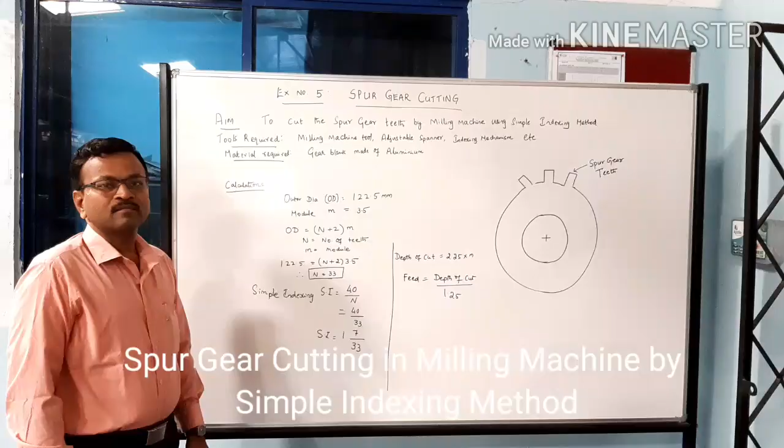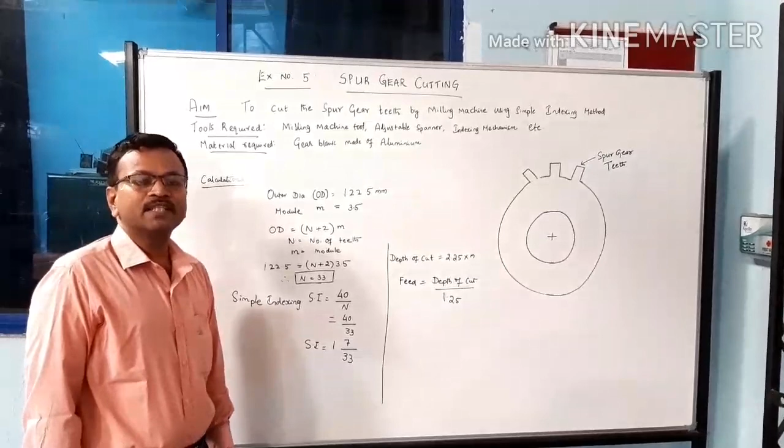Hello students, today we are going to discuss about the spur gear cutting. This is exercise number 5. So far you have done about thread cutting, facing, turning, knurling, taper turning, all the exercises are over in lathe machine. So now we have to cut the spur gear in the milling machine.

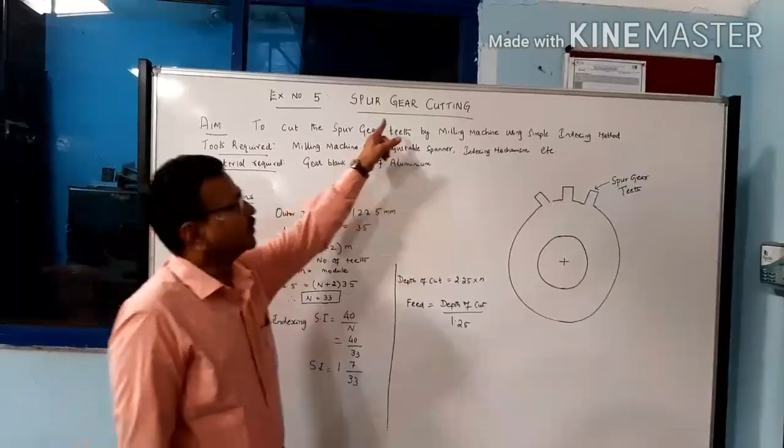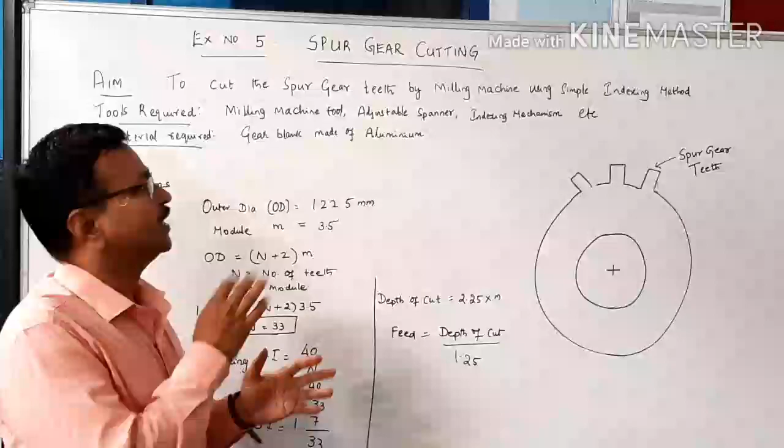Okay, first you understand what is the meaning of gear. Gear is a device which is used to transmit the power from one shaft to another shaft by successively engaging the teeth. That is the definition of a gear.

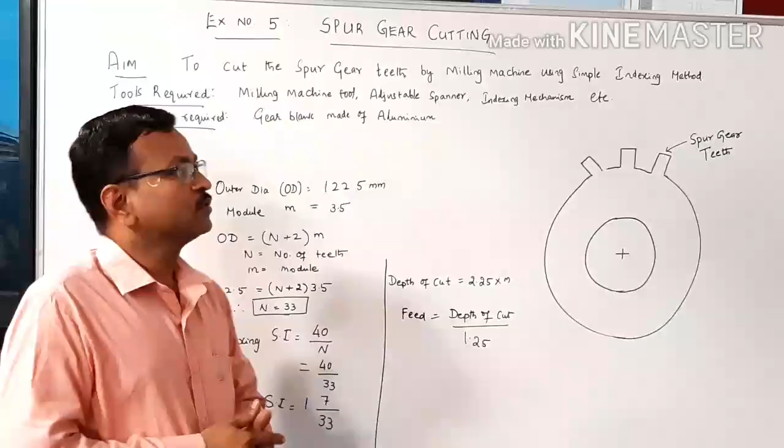So different types of gears are available: spur gear, helical gear, bevel gear, worm gear. So many gears are there. We have to cut the spur gear as per the syllabus.

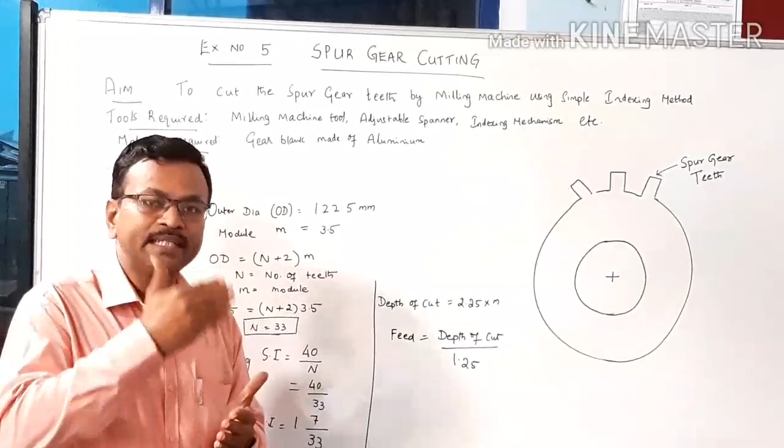So what is spur gear? Spur gear means teeth are straight, and they are parallel. So you want to transmit the power from one shaft to another shaft, those two shafts will be parallel shafts. Spur gear teeth will have straight teeth and they are used to transmit power between parallel shafts. That is called a spur gear.

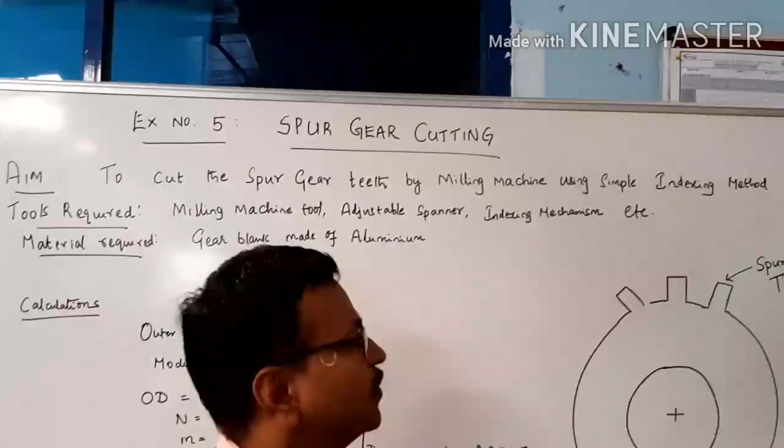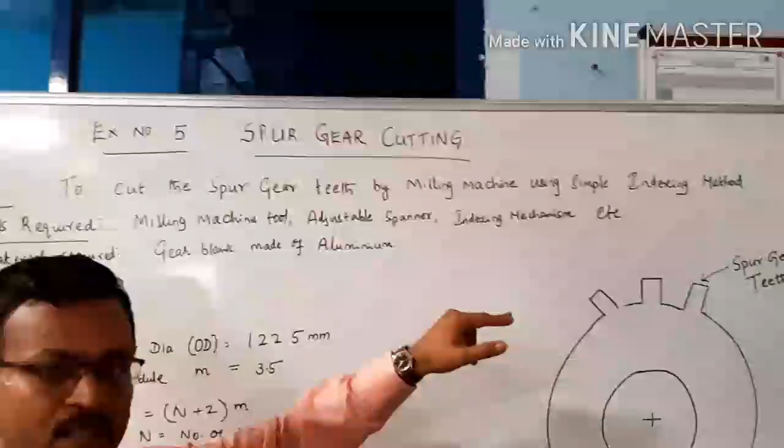The aim of the experiment is to cut the spur gear teeth by milling machine using the simple indexing method. Tools required for this: milling machine is required, you cannot use the lathe machine to cut the gear. An adjustable spanner is required to lift and lower the work table, and an indexing mechanism is required. Indexing attachment is there, we will show you. Next, material required is gear blank.

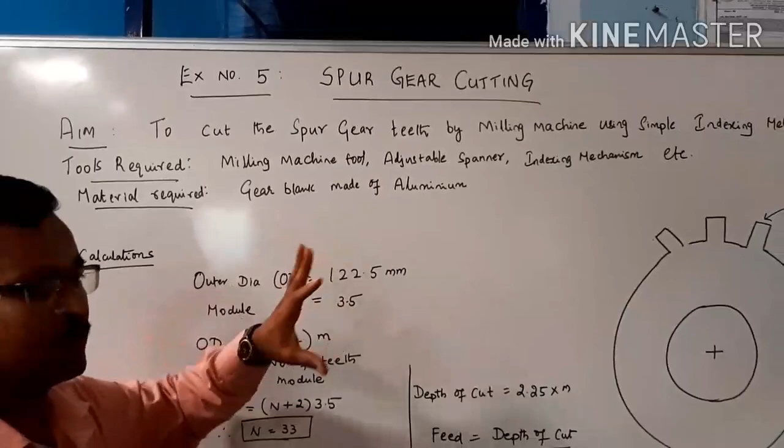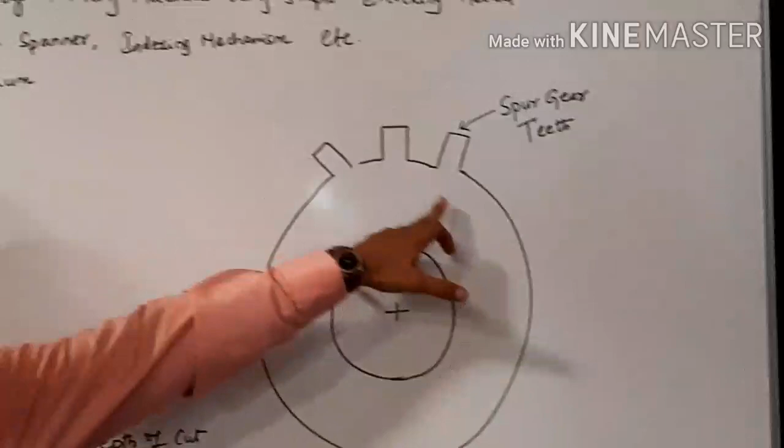What is a gear blank? Blank means it is empty, so it is a material on which we have to cut the teeth. You can see here a blank. We have cut 3 teeth on this gear blank, shown here. It's made up of aluminum material.

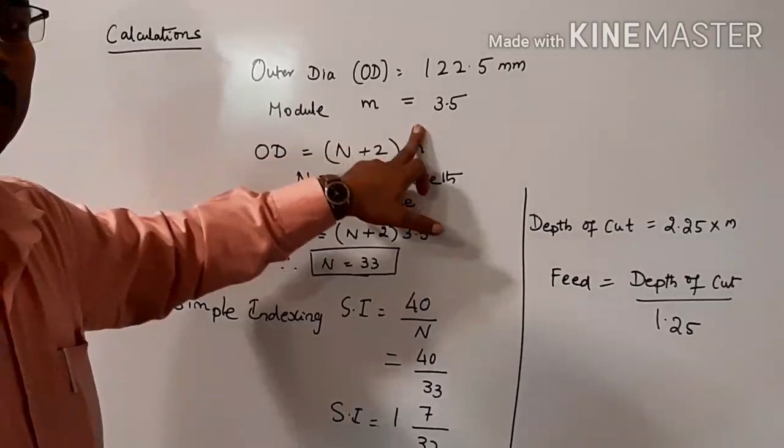The outer diameter, the calculations part, you can see here. The outer diameter OD is 122.5 mm. Next, module M is equal to 3.5 mm. Module, you have to understand the meaning of module. Module means the gear size, how big the gear is, whether a small gear or a big gear.

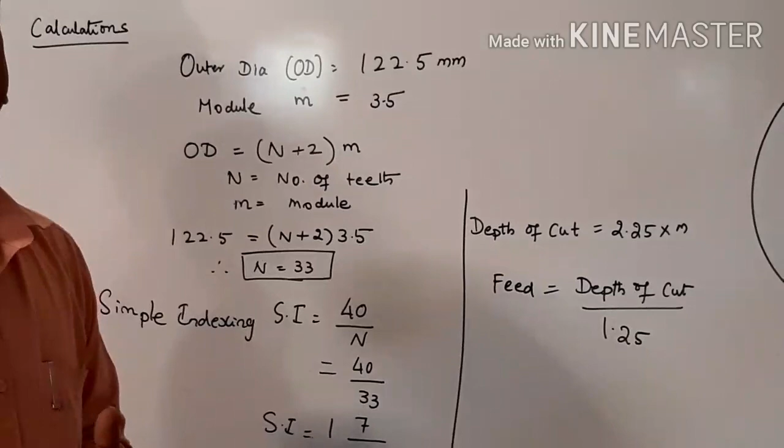So the module determines the size of the gear. The definition is the ratio of pitch circle diameter divided by the number of teeth, that is the module. For example, small size, so module will be small. Big module means big gear will be there. So module depends upon the size of the gear.

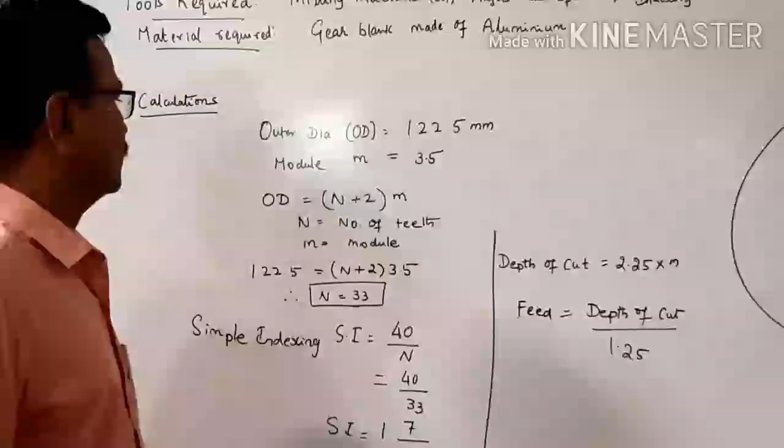Now the formula to calculate the number of teeth: outer diameter is equal to capital N plus 2 into M, where N is the number of teeth and M is the module. So outer diameter is given as 122.5 mm, that is equal to N plus 2 into 3.5. Therefore N is equal to 33. So we got number of teeth is 33. We have to cut 33 teeth on this gear blank.

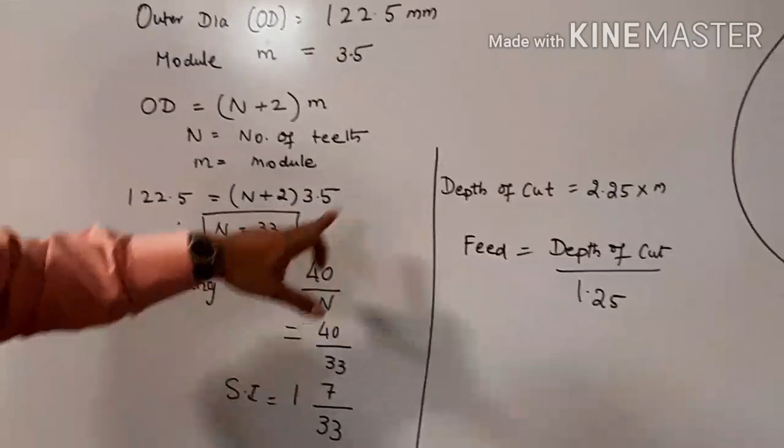Now the simple indexing formula is SI equal to 40 divided by N. So 40 by 33, we have to make it a mixed fraction. So simple indexing is equal to 1 7 by 33. It's a mixed fraction, so 33 into 1, 33 plus 7 is 40, 40 divided by 33.

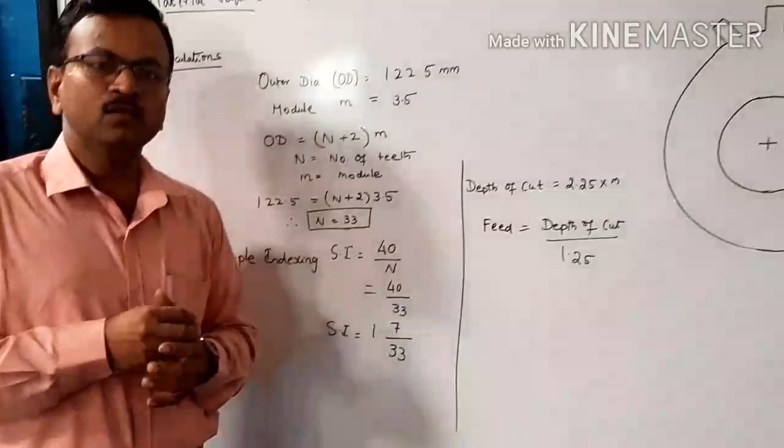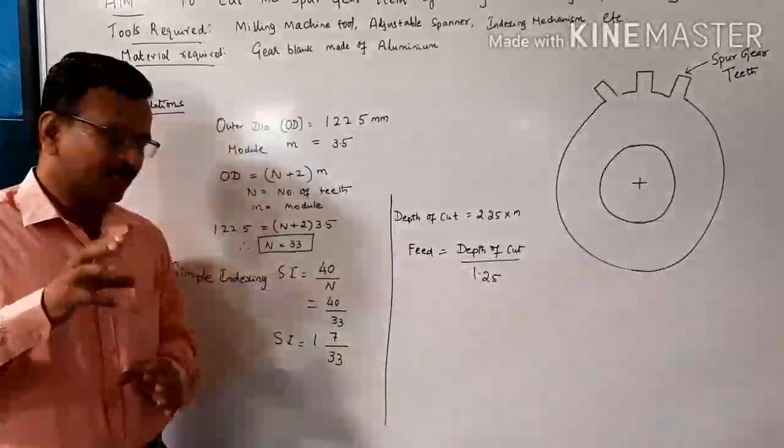So why we have to make this, means this indexing plate, different ratios are there. So even you can take another ratio also, but you have to get 40 by 33. So one of the parameters is 33. I will show you the indexing plate, 33 is there, 33 number we have to select on the indexing plate. So after that we have to fix that 33.

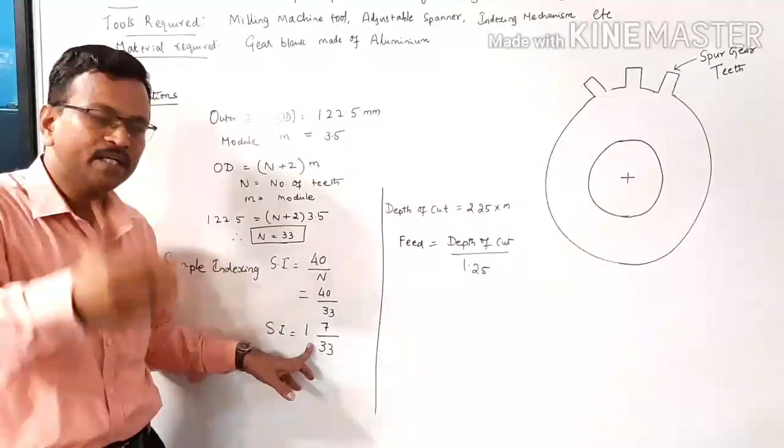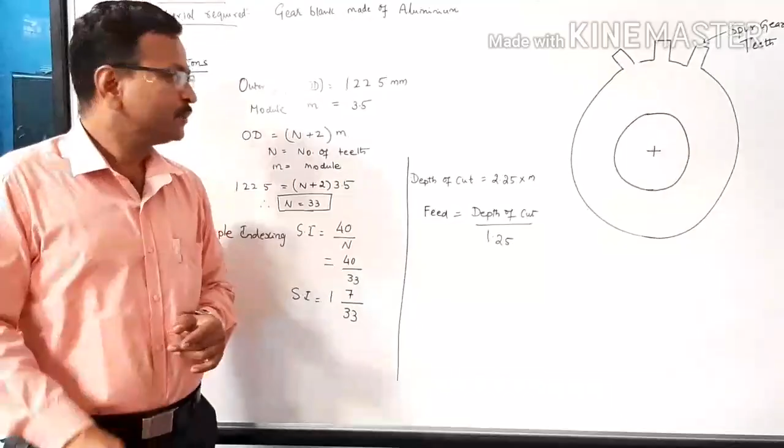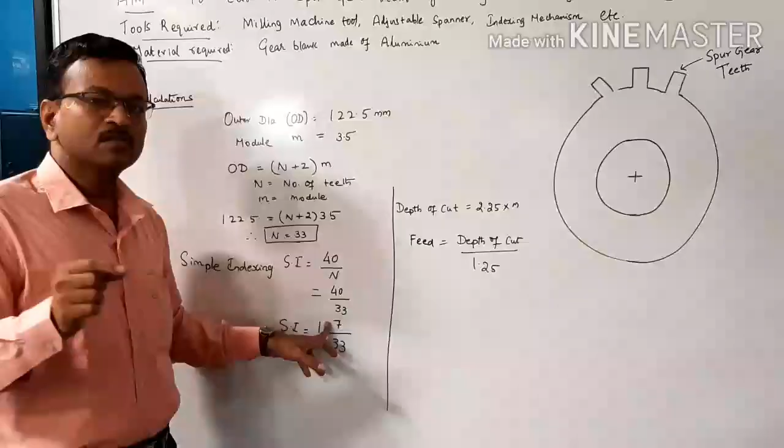Then after cutting one teeth, after one rotation, you have to move 7 holes. To move the 7 holes and again fix the gear on this indexing plate, you again start cutting the second teeth. Next, again you want to cut the teeth means again you have to go to the 33rd particular hole, then make one rotation, then go for the 7th hole. So likewise, the entire gear blank you have to cut using this simple indexing formula.

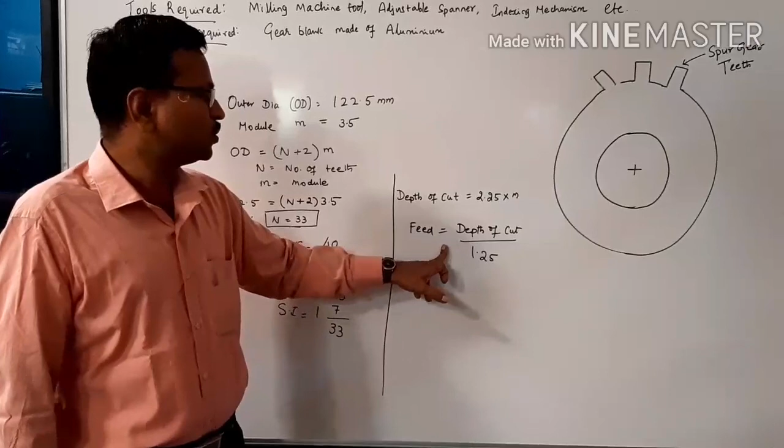So depth of cut is equal to 2.25 into M. Feed is equal to depth of cut divided by 1.25. So this is about the spur gear cutting formula calculations.

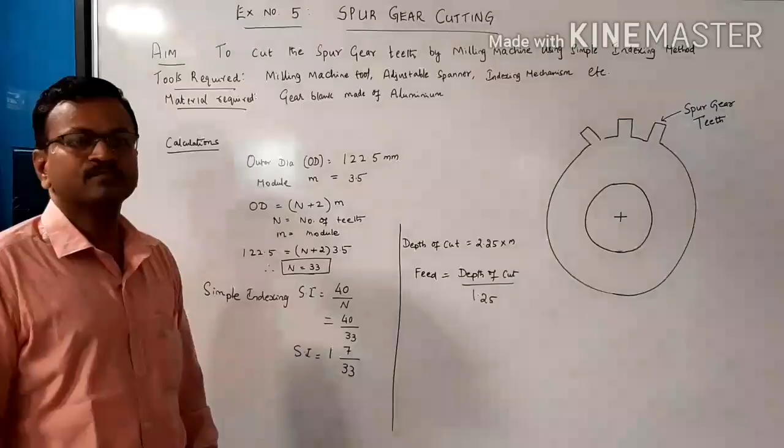Now we will go for the milling machine. This is a milling machine, the horizontal milling machine. How will you say it's a horizontal milling machine? Because the arbor, our spindle, is in horizontal direction, it's a horizontal milling machine. It's a milling cutter.

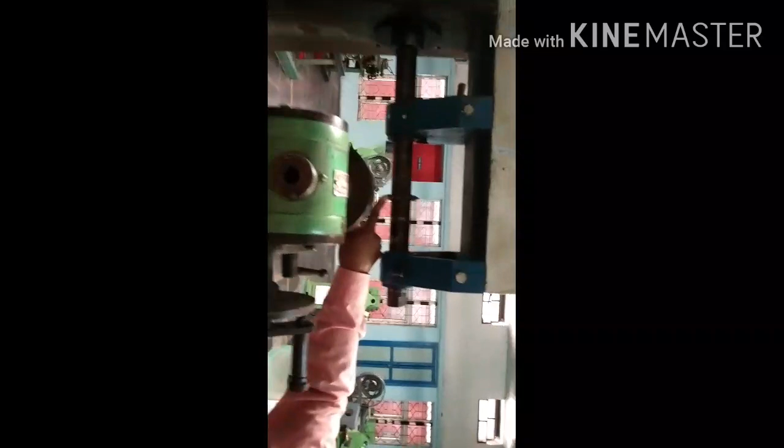Using this, we have to cut the teeth. A number of teeth are there that we have to cut, so it's a milling cutter. Number of cutters, cutting points are there. Using this, we have to cut the teeth.

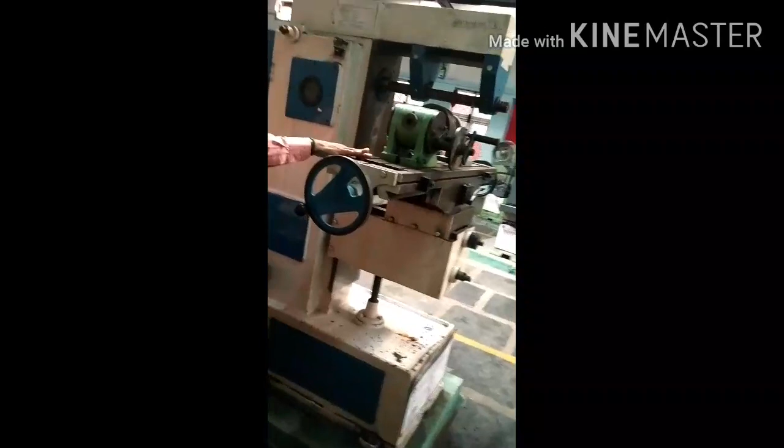This is the arbor. This is the column. This is the table, with the elevating screw. This is the work table. This is the hand wheel in order to do the feed for a workpiece. And this is the indexing mechanism, the indexing setup.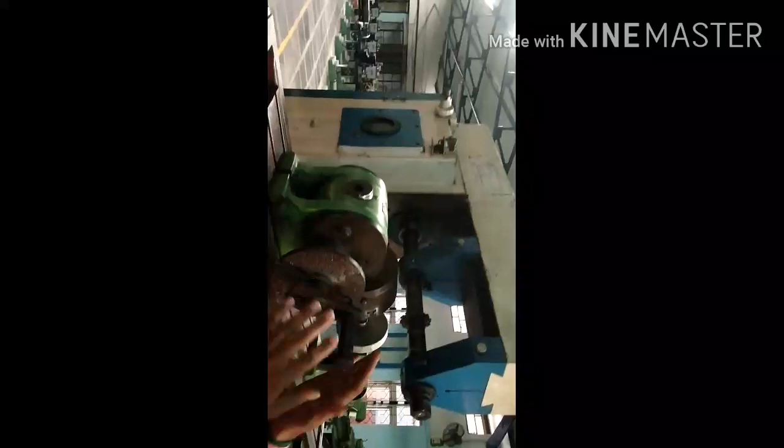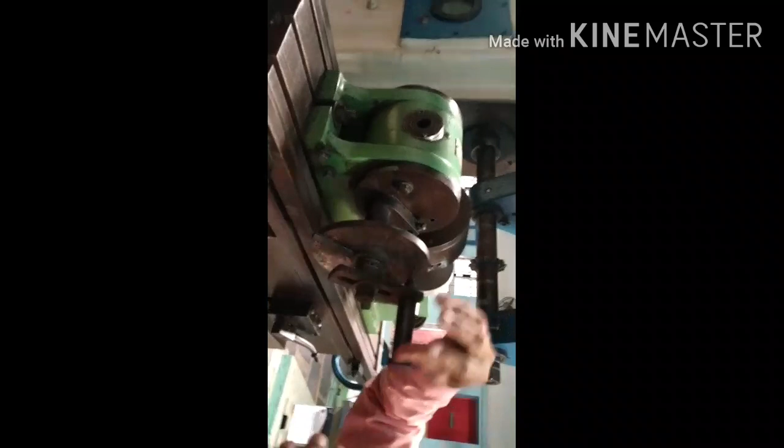The entire thing is the indexing setup. In this you have the worm and worm wheel attachment. The worm is like a horizontal shaft with teeth on it. Above that we have the worm wheel, which is going to rotate. So to make one rotation of the worm wheel, it has to turn 40 times. That is the worm wheel setup mechanism.

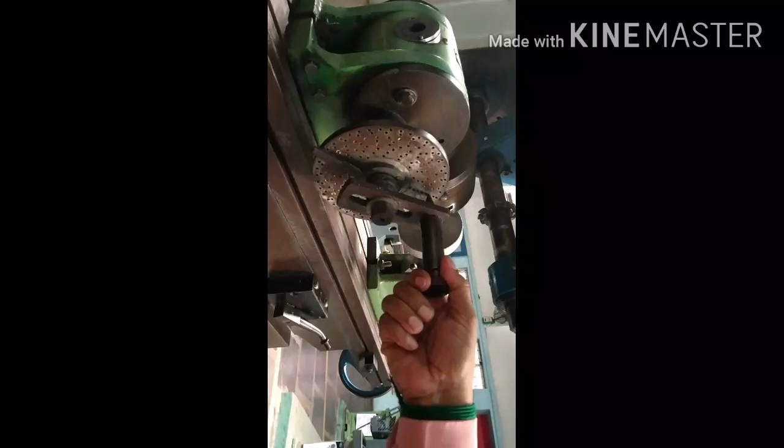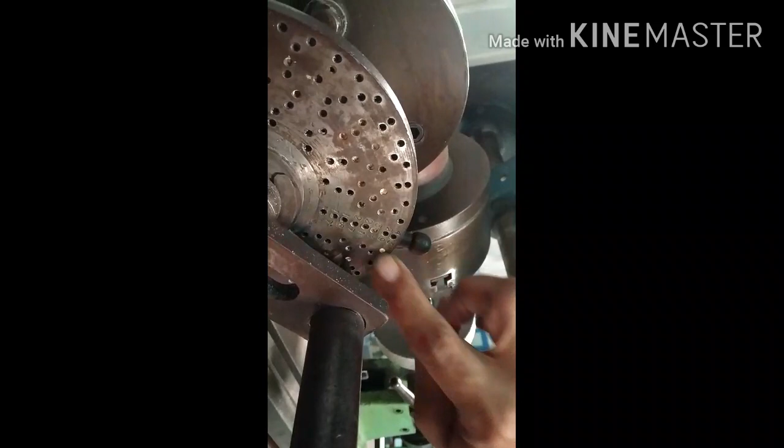And here we have different size holes. You can see here, this is 33. So we have 33 here, and 21. This is for the fraction - whatever fraction you want to make, you can make it. So we have 33, and you have to fix it at the 33 size hole.

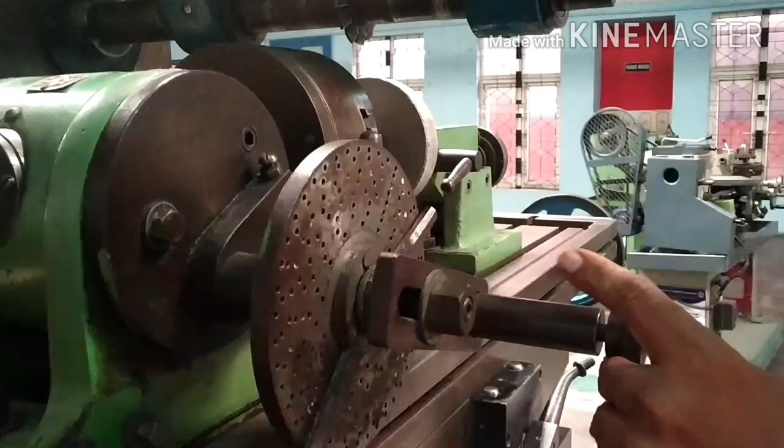In this, we have two types of milling: up milling and down milling. So what is up milling, and what is down milling?

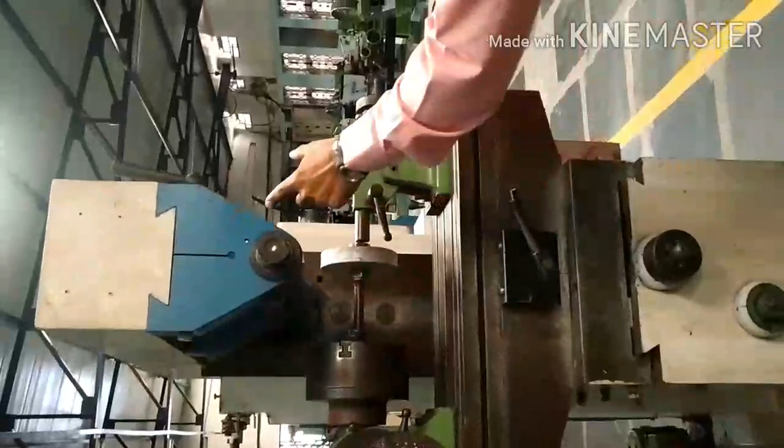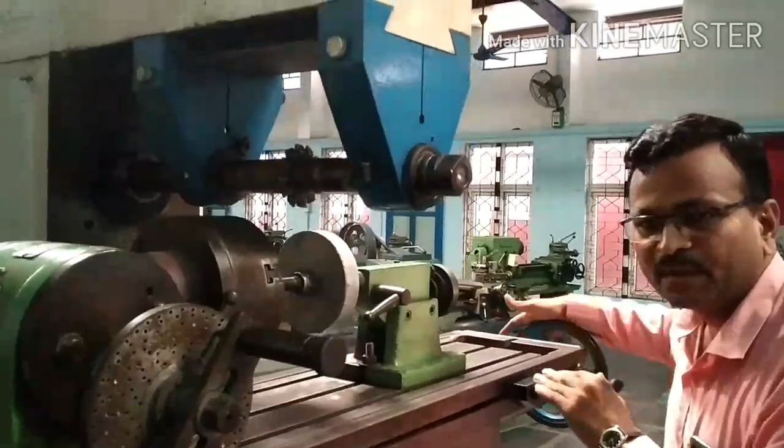Up milling means the workpiece is rotating in one direction, let's say clockwise. If the cutter rotates in the same direction as the workpiece, it is called down milling. If it's the opposite direction - cutter rotation one way, workpiece rotation the other way - that is called up milling.

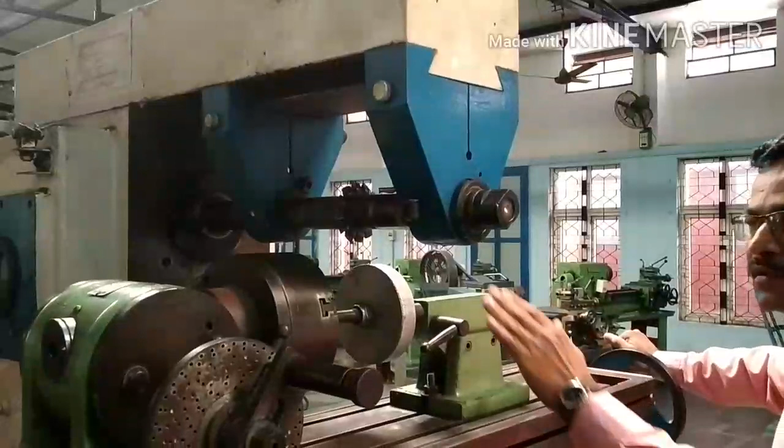So up milling means the cutter rotation is in one direction and the workpiece rotation is in the opposite direction - that is up milling. Down milling means the workpiece rotation and cutter rotation are in the same direction - that is down milling. Down milling is also called climb milling, and up milling is also called conventional milling.

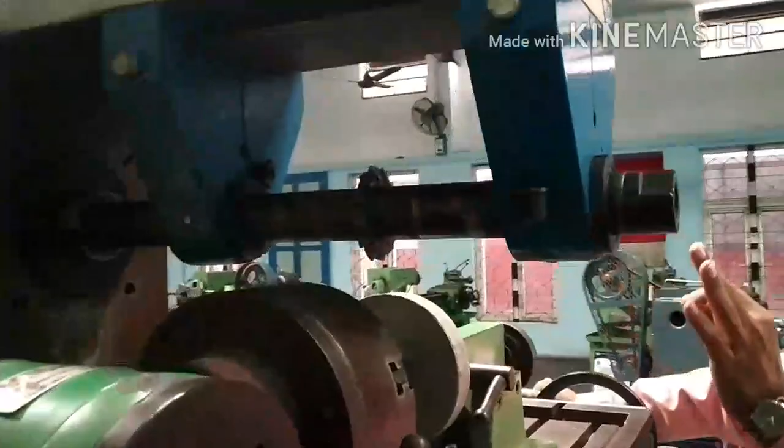I will explain once again, very simply. Up milling means the rotation of the cutter and the workpiece are in opposite directions - both opposite, that is up milling. Down milling means the workpiece movement direction and cutter rotation are both in the same direction.

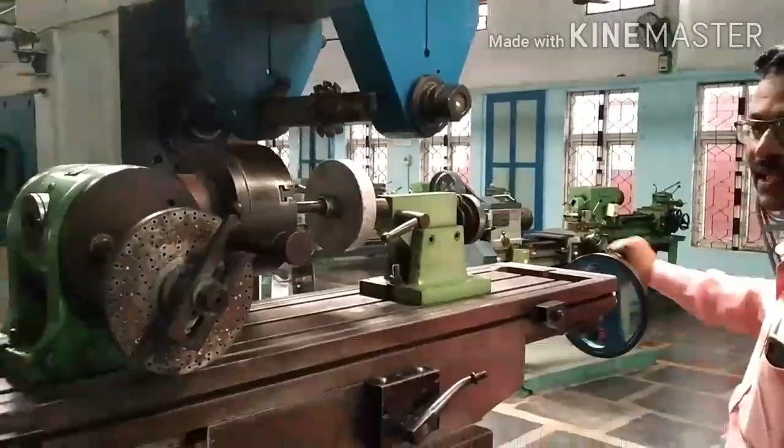For example, if I am rotating like this, it is moving from right hand side to left hand side - the workpiece is here, rotating, and the cutter rotates in the clockwise direction. So workpiece feeding and cutter rotation are both in the same direction - that is called down milling. If the cutter is rotating in the opposite direction, anti-clockwise, and I am moving like this, both are in opposite directions - then it is called up milling.

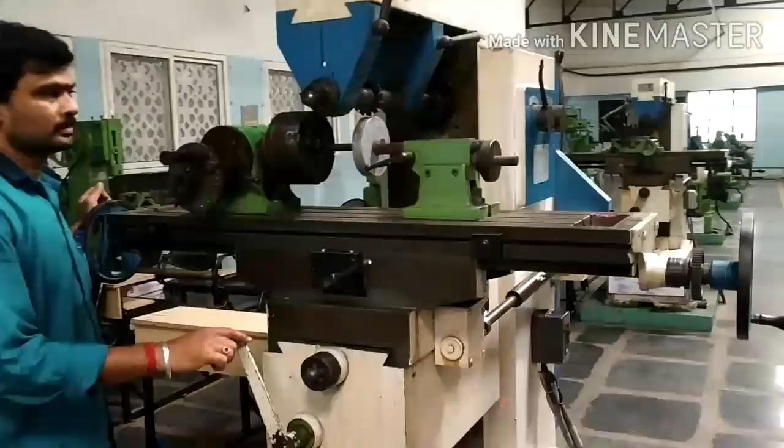Now you have to cut. This is the gear blank, held in the three-jaw chuck or vise. This is the cutter, this is the arbor. Now you have to start the cutting procedure. Now you can see the cutting procedure.

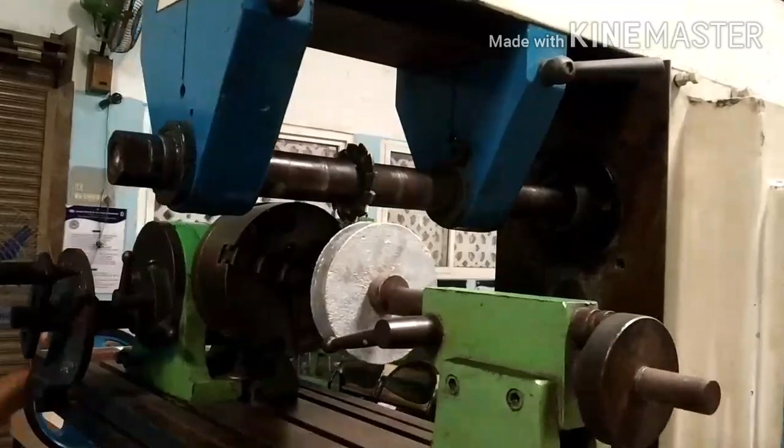First you connect the tool and workpiece. Switch on the machine.

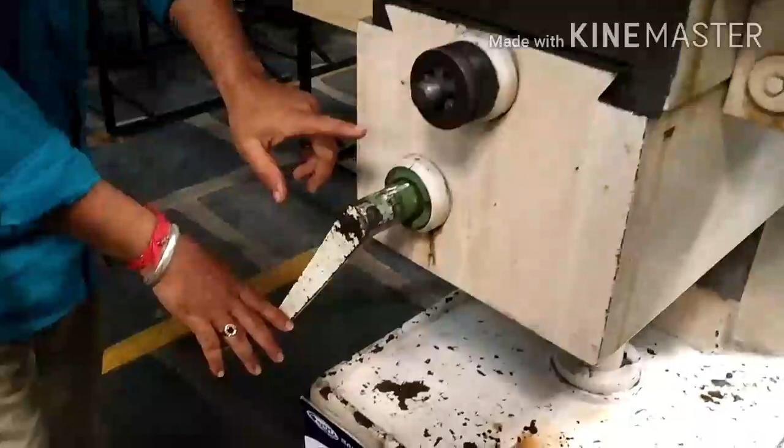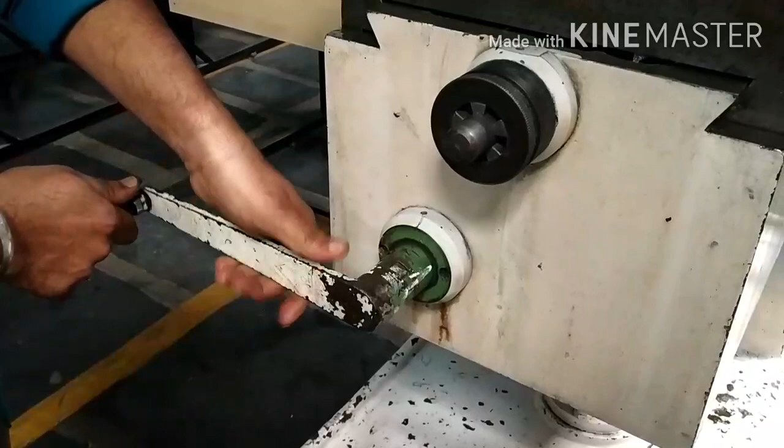Depth of cut - use the depth of cut. Now first you connect the tool and workpiece. Now this is the depth of cut, one revolution 1.25. Now you can give the depth of cut, 6.3, 6.3. Now, 1, 2, 3, 4, 5, 6.3 approximately. Now this is the depth of cut.

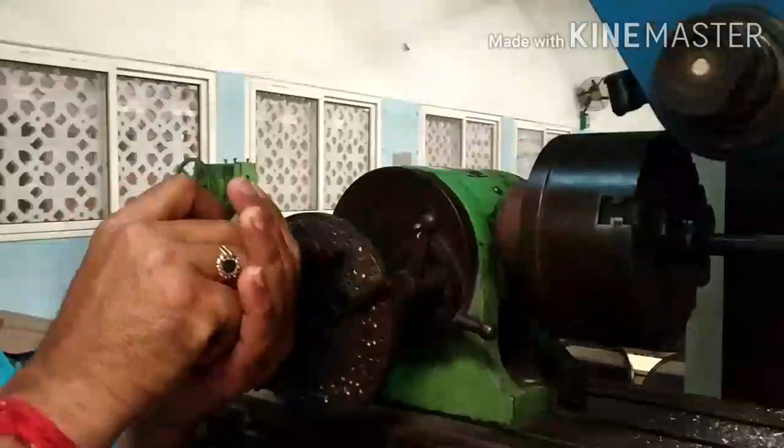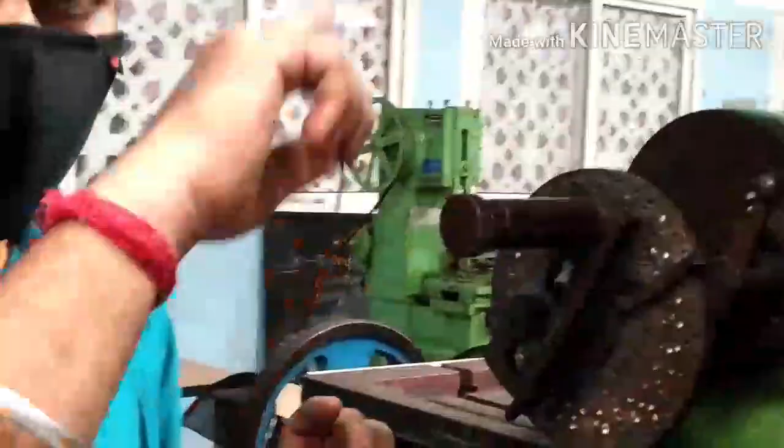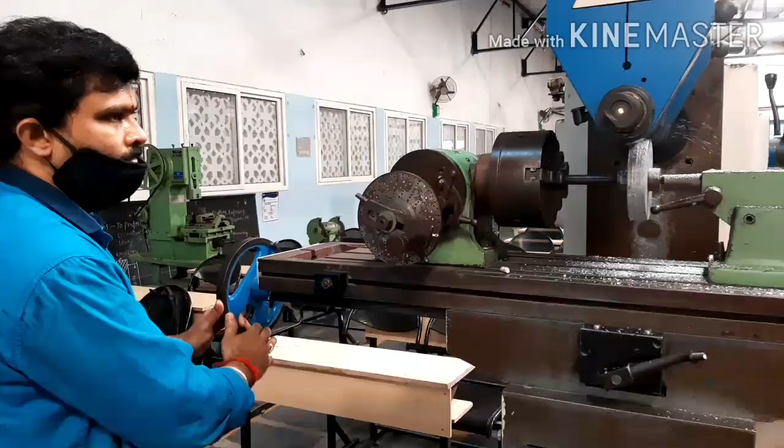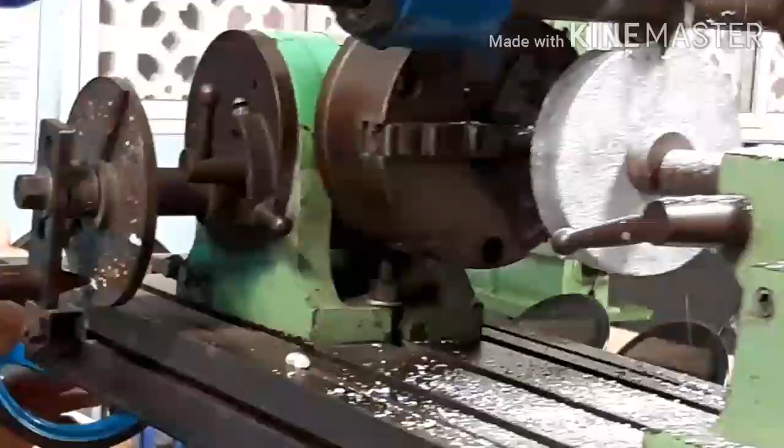Rotation: 33 completed. Next add the 7 holes - 1, 2, 3, 4, 5, 6, 7.

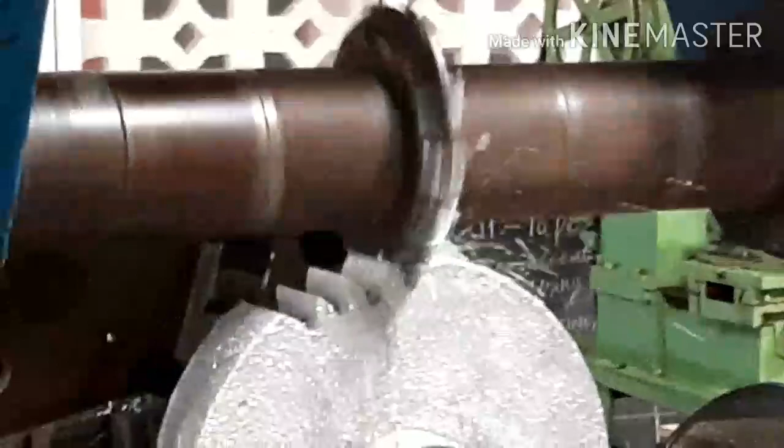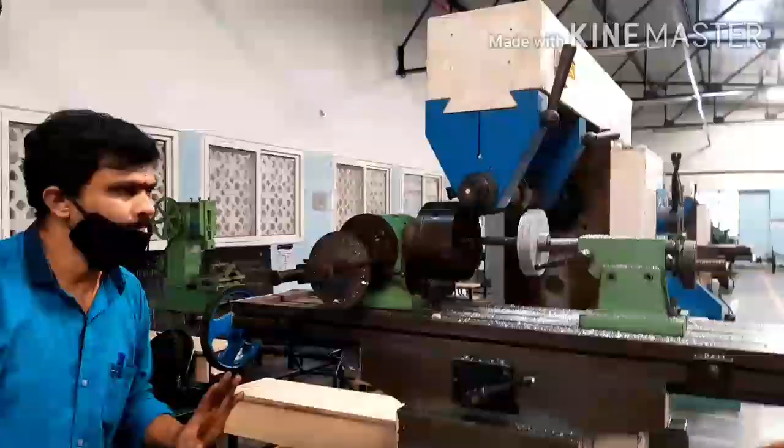So now we have cut 4 teeth here. Likewise, every student has to cut two teeth. They have shown the demonstration, so in this way, in the examination, you should do it. Thank you, and you have to write the record also on this.